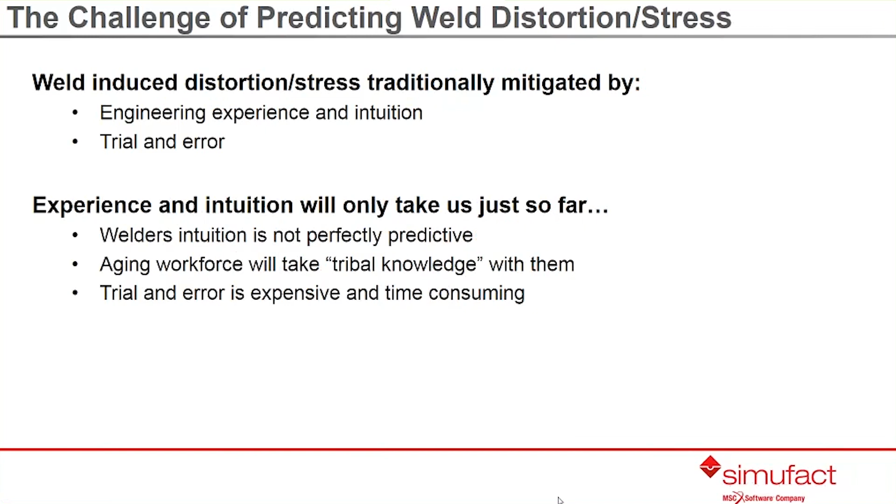The primary challenges with weld distortion and residual stress have traditionally been mitigated or managed by two primary ways. One would be the experience of the welding engineer and good old-fashioned trial and error. Unfortunately, the experience and intuition of welding engineers is not perfect and not perfectly predictive. And with today's aging workforce, a lot of this tribal knowledge is going to go away when those individuals retire. Additionally, traditional trial and error is generally expensive and time-consuming.

There are modeling tools that can predict weld-induced distortion and stress. However, these tools need to be more accessible. They're typically difficult to utilize and generally not available to those people who do not have extensive FEA or finite element analysis experience.

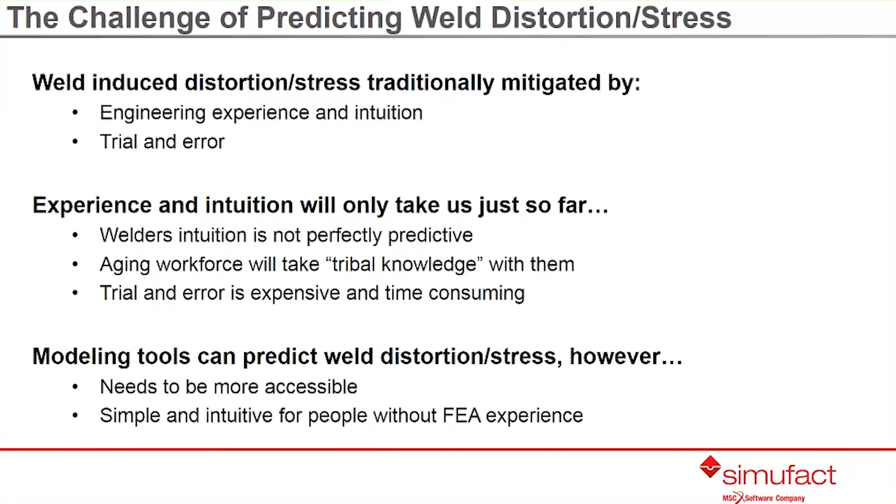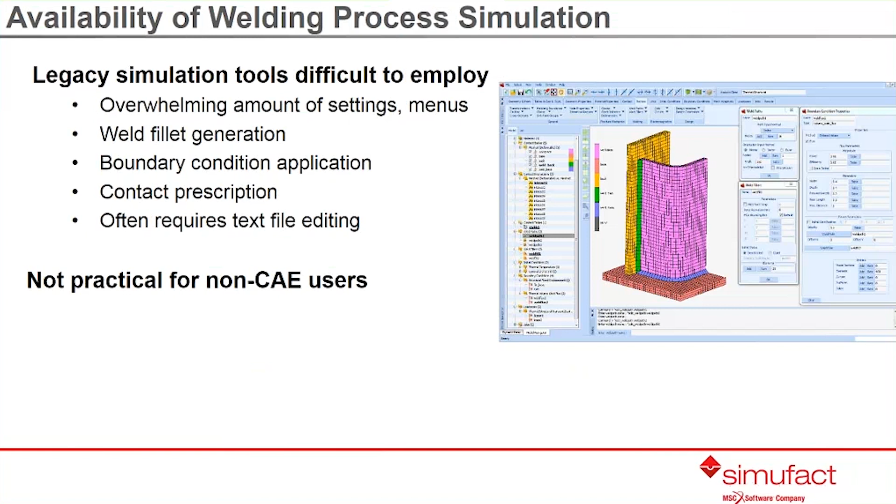What we would call legacy simulation tools are difficult to employ. There's a huge number of settings, difficult to create things like weld beads or boundary conditions, clamps, fixtures. One has to often prescribe contact, tell the software when bodies are in contact, and even get into the point where you have to edit the text file that drives the simulation. All of this makes it not practical for people who are not very well versed in CAE.

So I asked the question: if it wasn't limited by the complexity of the software, who would be the right group of people to utilize the simulation? In my opinion, it's the welding engineers, or at least people a little closer to the shop floor.

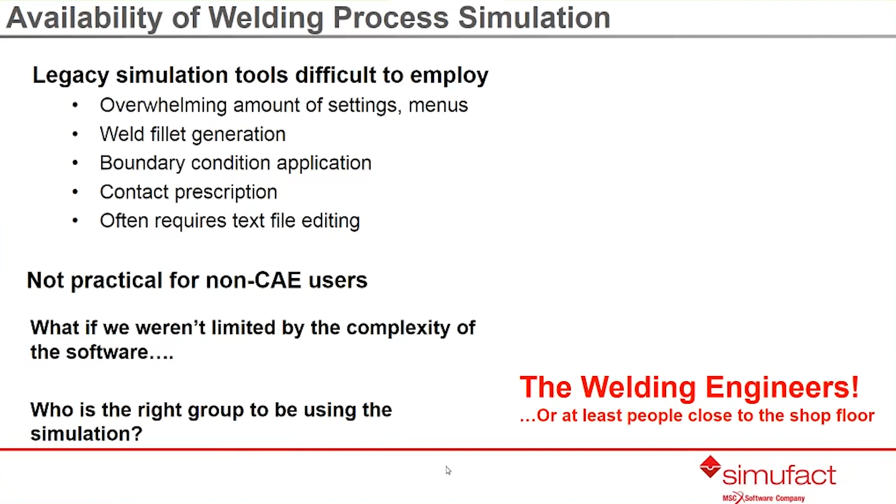Looking at the difference between the two groups, there's a significant gap between the environment of the CAE analysts and the welding engineers. They're separated by a number of things we'll look at: experience, work environment, organization, time zone.

On the left-hand side, typically the CAE analysts and designers have an education or experience of master's or PhD level in computational methods or some other high-level work. They work in a computer lab or design studio. A lot of times it's within the design group, and oftentimes far away from manufacturing or even overseas.

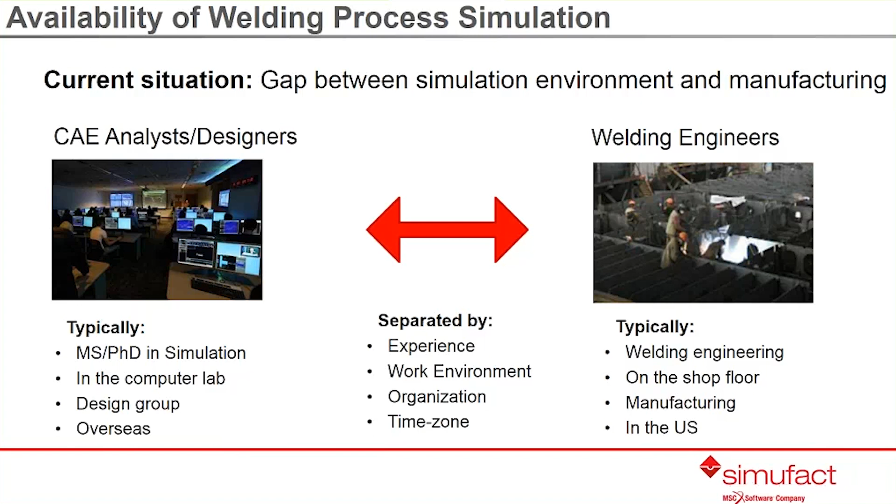By contrast, the welding engineers are welding engineers, or in many cases welding engineering technicians or technologists. They work on the shop floor, close to the fabrication and manufacturing, and are in the US or very close to where the parts are actually being manufactured.

So what if we enabled the welding engineers to run their own simulations? This is where the concept of democratization of welding CAE, or welding simulation, comes in. There are several advantages to this. First is the opportunity to have greater amounts of analysis being done, because you have a greater number of people who have access to it and can make it work.

Also, these welding engineers have the insight to realistically model the process. They understand welding and how to realistically model it, and what sort of steps to take to mitigate weld-induced distortion and stress in the real world that can be applied to the finite element analysis models.

This also reduces the time and communication loop necessary to build and iterate on models. If every time they created a model you had to communicate between the welding engineer and the designer, and then the designer has to create the model, solve it, send the results back, and have another meeting and another meeting—each of these iterations or communication loops is time, and an opportunity for error within the communication. Generally, it also increases the base of knowledge for the organization.

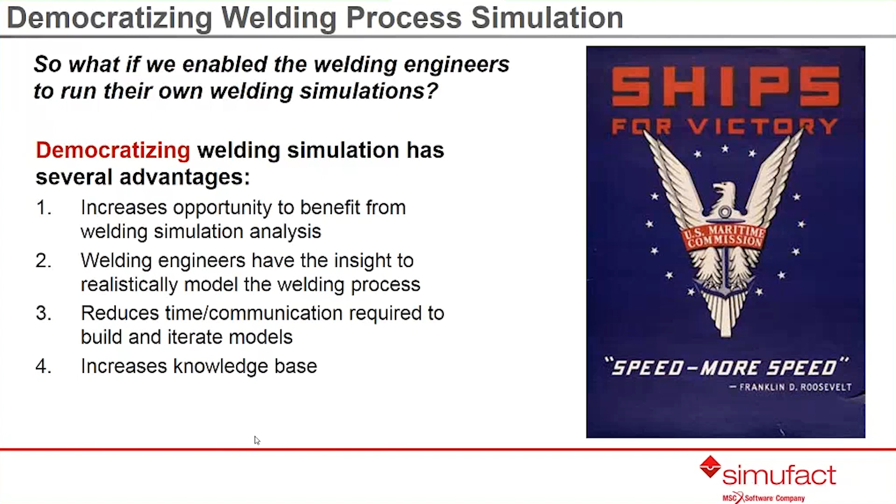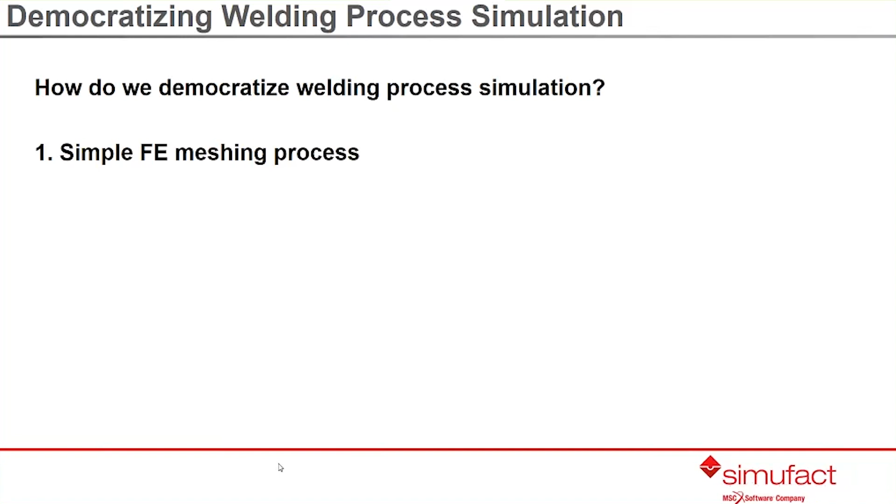So the question is, how do we do this? How do we democratize welding process simulation? The first part is a simple FE, or finite element, meshing process. The second is a process-oriented user interface—something that mirrors the shop floor and the process on the shop floor, minimizes the requirement for FEA so you don't have to be an FEA expert, is capable of modeling all the different welding processes, and also simplifies a lot of the process modeling.

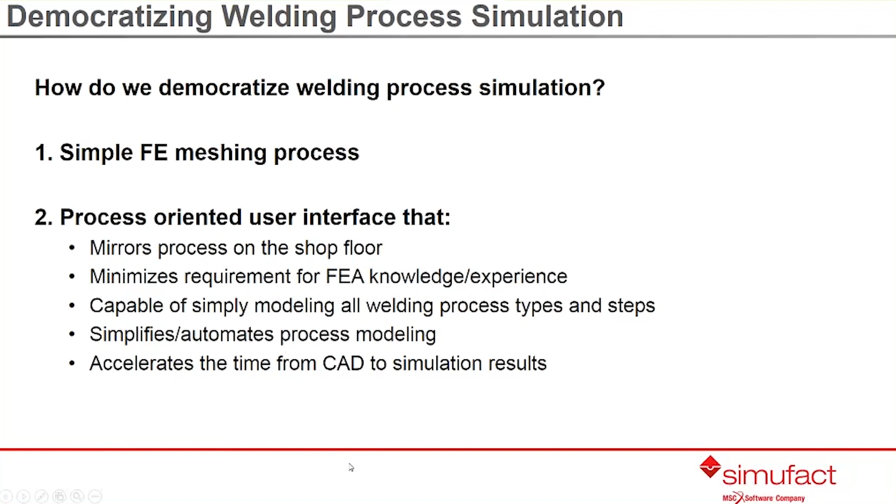The benchmark we always use is time from CAD to results. So the first step would be meshing. For any of you familiar with finite element analysis, you know this can be very painful and take a long time in many cases.

With the MSC Apex tool that we utilize within our welding workflow, this time is reduced dramatically. For flat surfaces, as you can see here, we utilize a mid-surface where we create a 2D mesh. Then for bulkier parts like these rings, we can create a volume mesh. In this case, we're going to create a mesh in about 30 seconds.

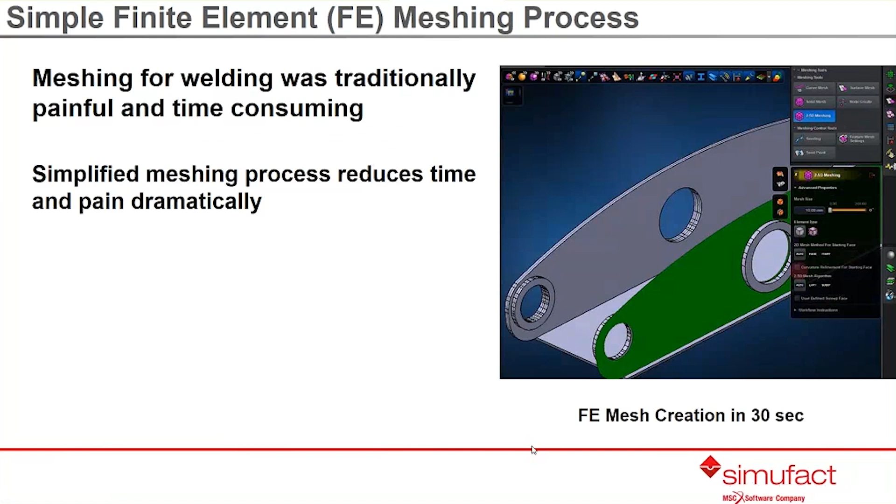So here we're going to select which part we want to mesh, and then be able to seed that part and actually create multiple elements through that thickness, say 3.

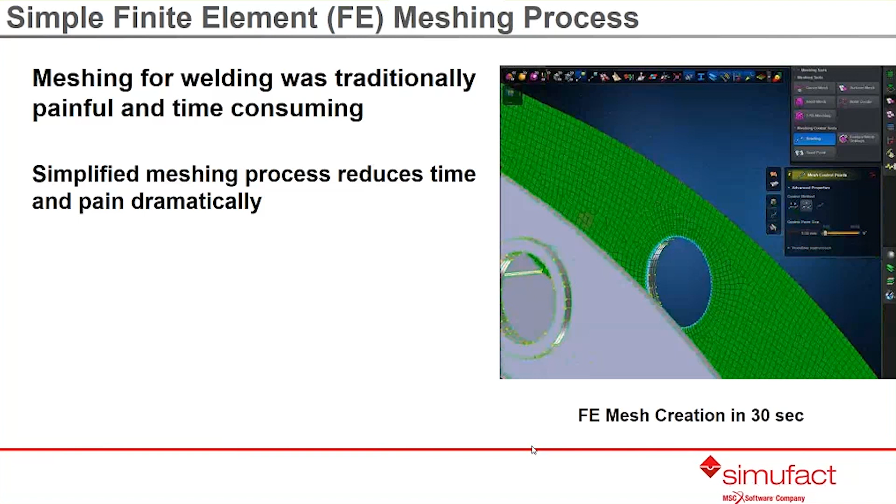Then we're going to create the surface mesh for this other part, the side. And perhaps we want to seed that mesh to give it a little bit of refinement closer to the welded area. And you can see that the mesh was created. So from this 2D mesh, we would then export from MSC Apex, and then upon importing into Simufact Welding, that mesh would automatically be expanded to a solid volume, utilizing either a solid mesh or a solid shell.

As I mentioned, this is becoming a semi-automated process. We do actually have subroutines that can do this, or much of this work, in an automated fashion, taking something that would have typically taken many, many hours or days down to, say, less than 10 or 15 minutes.

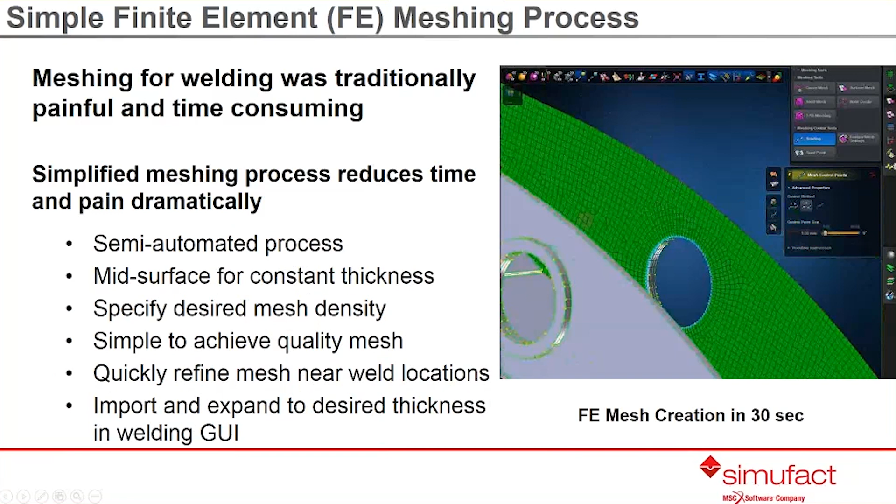So the next aspect of it that we discussed was the process-oriented model setup. And I'm going to go ahead and click this animation, let it play, but basically we're going to go through this same model that we're utilizing as this outrigger, something you would see on, let's say, a bucket truck. I'm going to go ahead and let it play, but you're going to see essentially the entire process modeling step be completed in about 3 minutes.

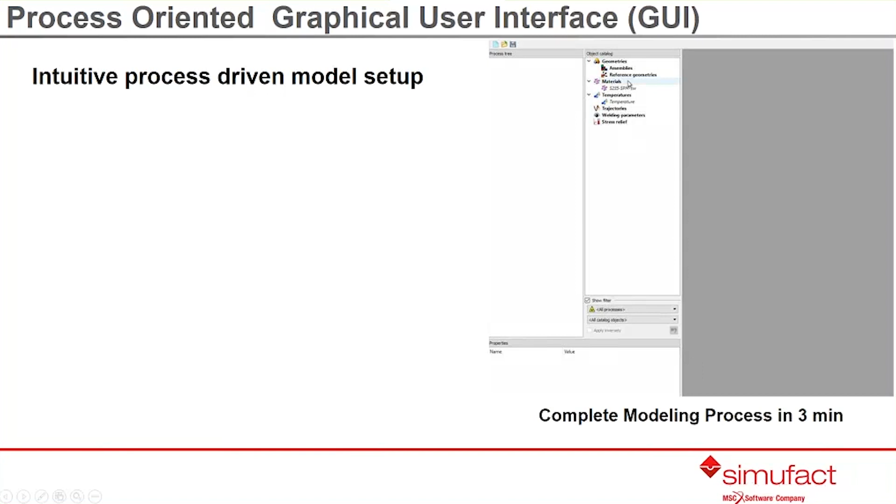So within this workflow, you can see that, again, we're going to go ahead and basically import the geometries. And you have an object catalog on the right-hand side, which is where all the parts, all the different components, are imported. You can select a variety of processes.

And basically, utilizing an automated approach or semi-automated, to utilize wizards, and that sort of thing, can accelerate the import and creation of the model.

So this is the mesh that we just created. We'll go ahead and create a weld line. And we're going to go back through some of this stuff in a little bit more detail in later slides.

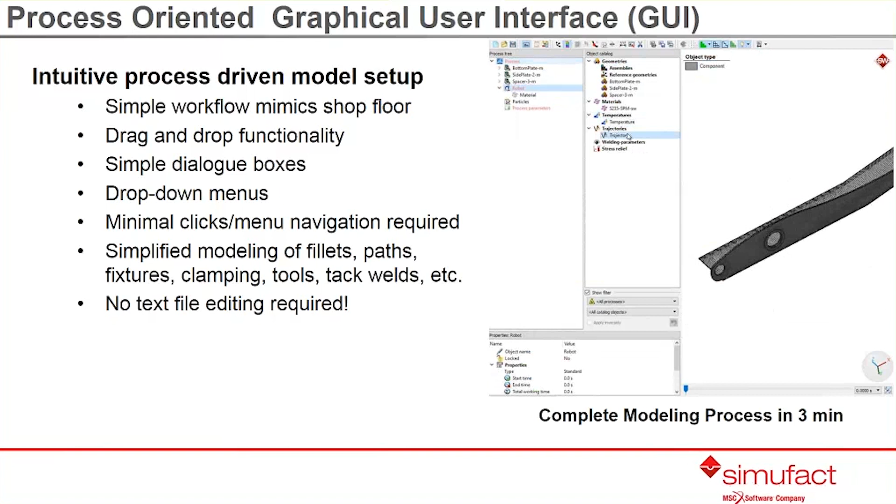But as I mentioned, being able to go and have a workflow that mimics what's happening on the shop floor is very similar to what you would actually create. I mean, what do you need when you're building a welding, a part for welding or setting up a process?

You need parts, it has fixtures. The parts are made of a material. You have weld lines. Those welds have a filler oftentimes associated with it. Also the weld settings: voltage, amperage, travel speed, and a heat source.

And so being able to essentially set up the welding simulation to mirror what you're doing on the shop floor, without having the extra complexities associated with traditional finite element analysis, makes it much easier and quicker to set up.

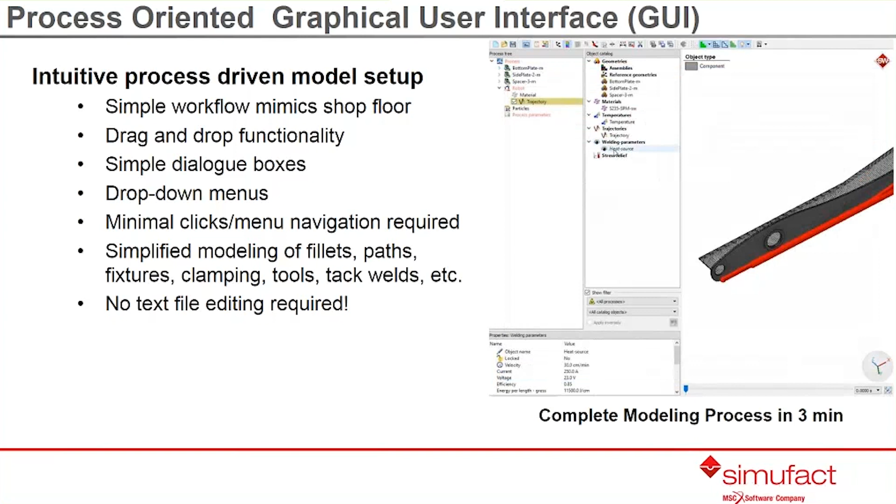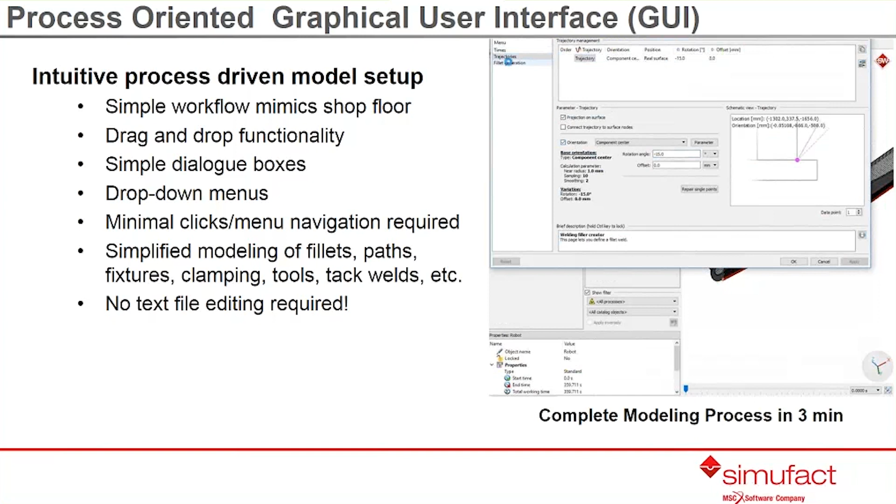Again, being able to have simple drop-down menus and dialog boxes that control these things. We're looking at a very simple part here, but you can do this with hundreds of welds and varying weld geometries, and still be able to very effectively, quickly, and simply do things like creating weld beads, creating clamps and fixtures, things that often would have taken a great deal of time.

And this is actually one aspect of it, the fillet generation, that saves a tremendous amount of time. You can see that we're actually creating the weld bead right there, and if you want to, you can vary it, and it's automatically updating the weld bead geometry.

So a lot of these things we've simplified, as I mentioned: modeling weld beads, paths, fixtures, clamps, tools, tack welds, etc., and then no need for text file editing required. So that was basically the entire modeling process, give or take, in about 3 minutes.

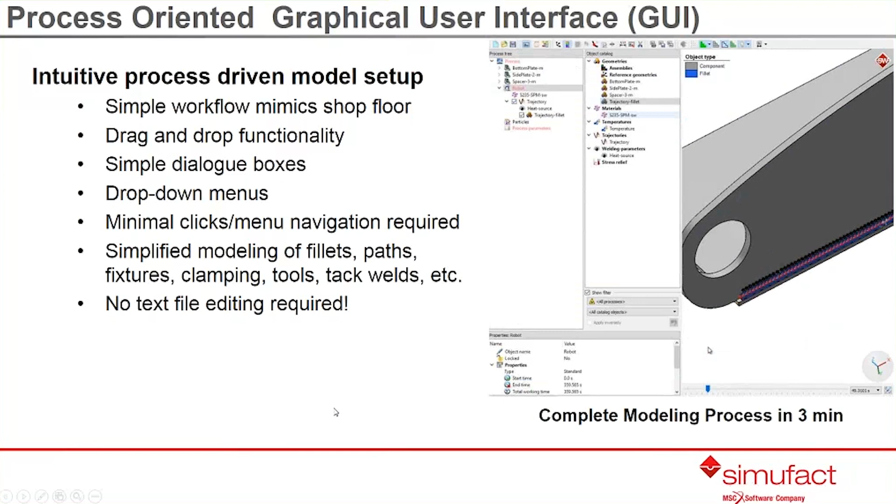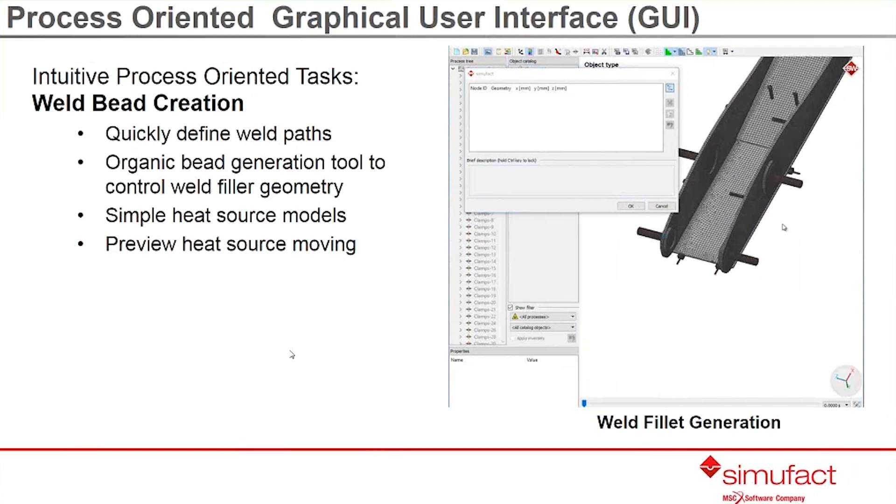So as we mentioned, going through in a little bit more detail, now you can see the remainder of this model being set up, being able to quickly define weld paths and having the ability to organically create weld geometry. Basically going to go through the same thing that we saw a second ago in a little bit more detail.

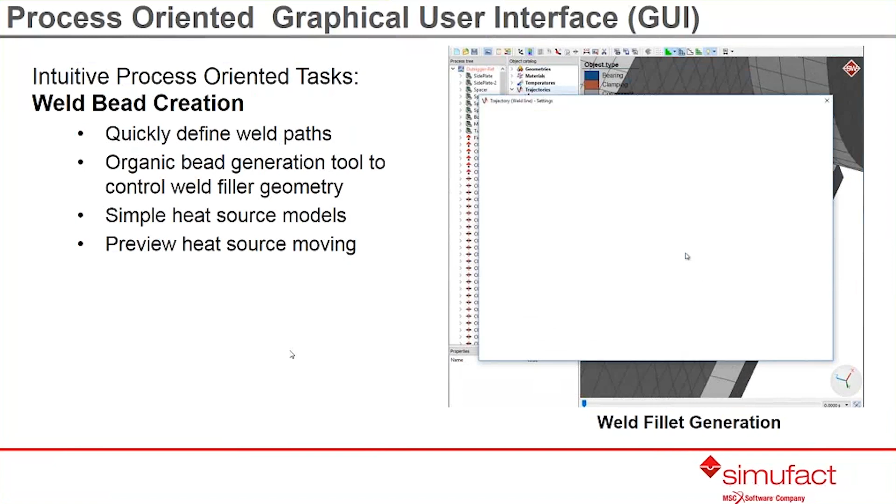So you're basically picking the nodes along this intersection, and it's automatically selecting the points along that line. And then that becomes a weld line. And you could easily change the orientation or start from one end to the other.

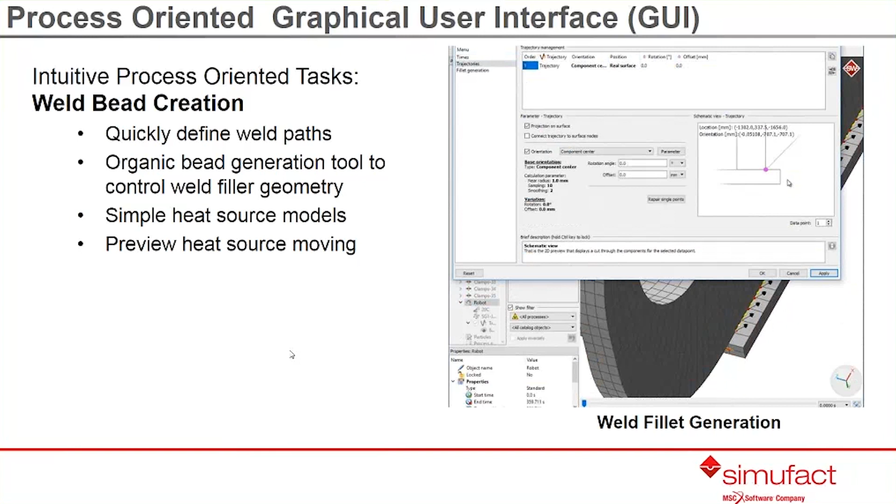And then we just drag that weld line onto our, what we call robot or welder. It should be, in my opinion, a welder, not a robot, but then you can vary the orientation of the part. So if you wanted to have the torch have an inclination angle, again, this is going to affect where the heat source is going to impact or intersect your geometry, as we'll see in a second.

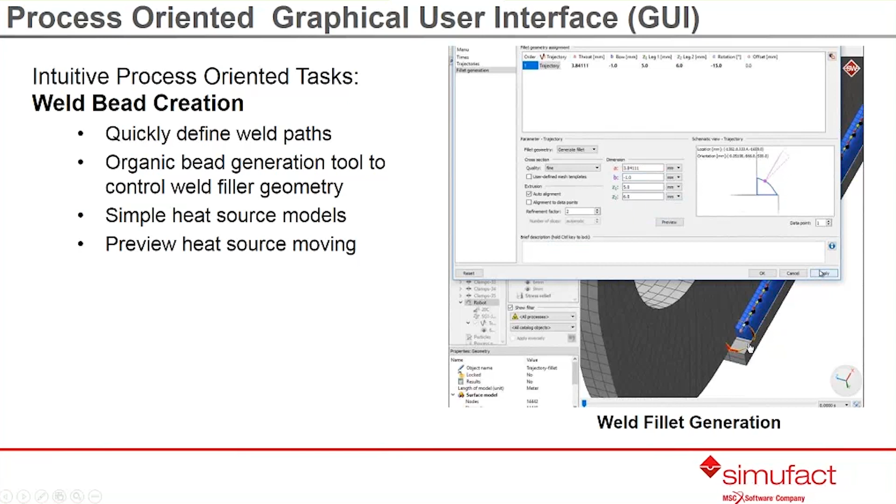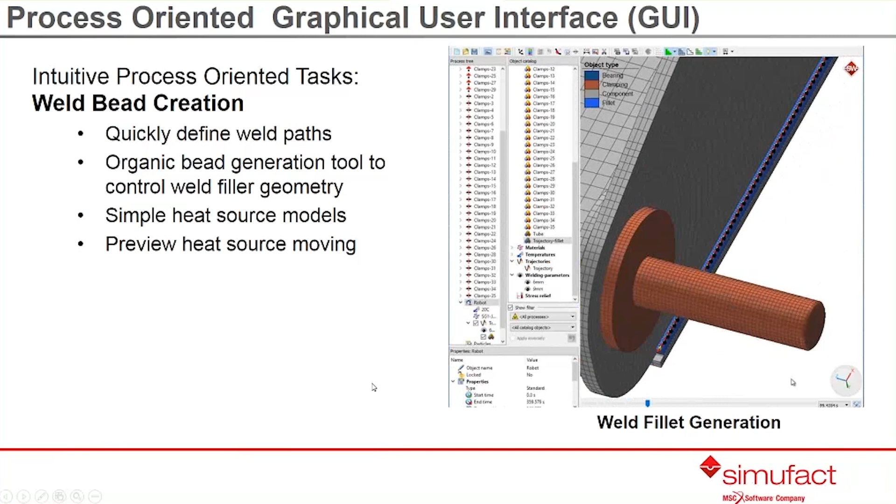And then we're going to go ahead and generate that weld fillet. You can see also that little red heat source down below. This is actually your heat source that can be adjusted, and that's the volume where the heat, the energy, is imparted to the part. So there's a good amount of control, and this is something we're continuing to improve to make much more flexible in being able to vary these weld beads. You can play the animation, slide it back and forth to follow your heat source around before you actually commit to initiating simulation.

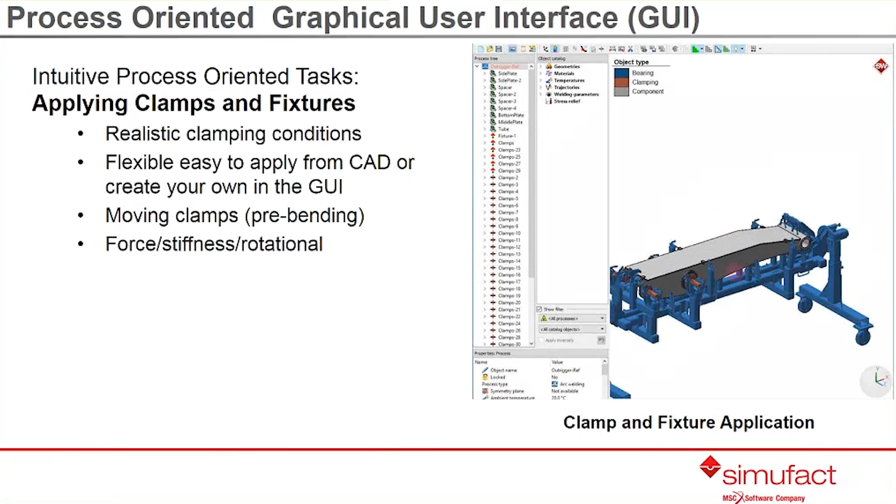Similarly, applying clamps and fixtures is something you very often do within a welding simulation. You can see here that we're utilizing the entire fixture, something that may or may not be relevant. So being able to have realistic clamping conditions and then flexibility to either build it in from your CAD or create it within the user interface. Within a clamp, we could utilize stiffness and force, or what we call a moving clamp.

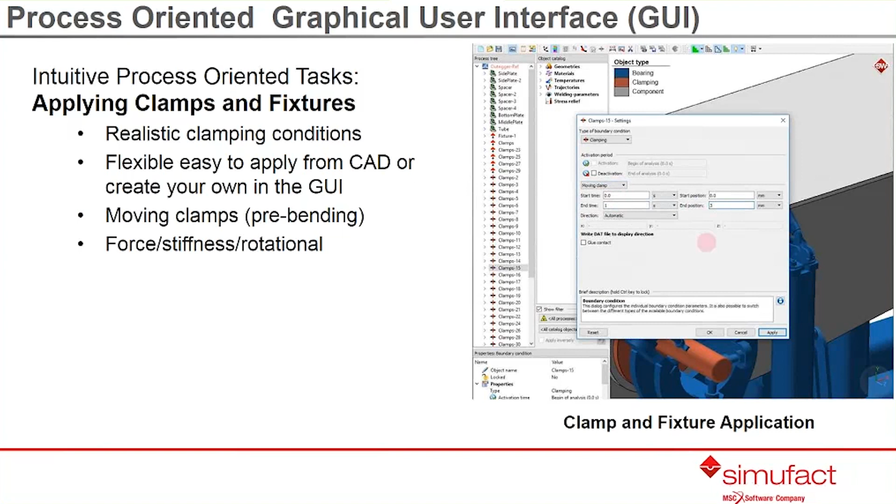Stiffness has just stiffness, or you could apply a force as well. In this case, we'll have a stiffness, which could be translational as well as rotational stiffness. And then a moving clamp, essentially it says push in a direction, displace the clamp a certain displacement over a period of time. So in this case, it would take 1 second to move it 3 millimeters. And whatever force would be required to push that in the specified direction would be applied, and that would impart a residual stress and potentially plastification of the part.

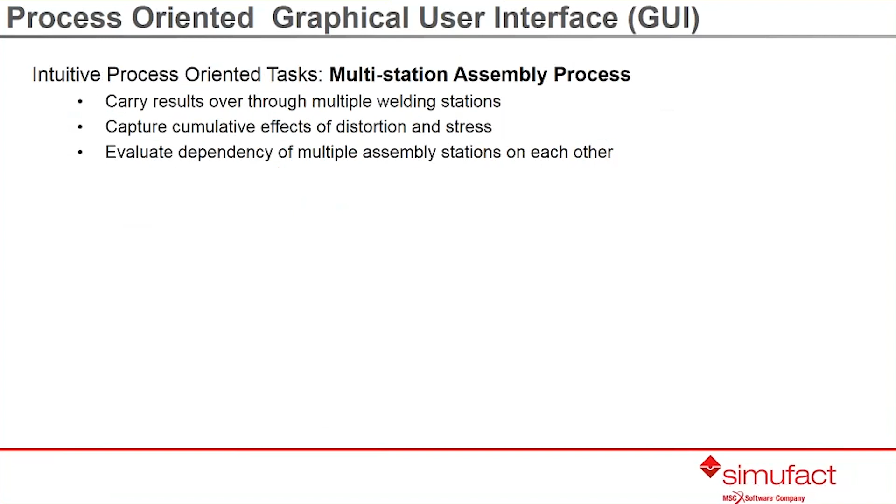Also being able to have a multi-station assembly process. This is something that came out of the auto industry and tier 1s and OEMs wanting to be able to go through the assembly process and essentially go station by station through the welding process. And as you get these distorted parts, oftentimes they don't fit very well.

And so being able to actually assemble them through what we call a cooling and clamping step, you can push parts together. You can, let's say, force them to overlap each other, and if there's some sort of intersection, the software would actually resolve that intersection and allow it to slide around each other, so as to achieve the type of fit that's very realistic.

This could also be used to take a number of pre-distorted sub-assemblies and clamp them into contact, clamp into place. Something that would have been very, very difficult to do in legacy welding simulation environments. And of course, it captures the cumulative effect of the distortion and stress.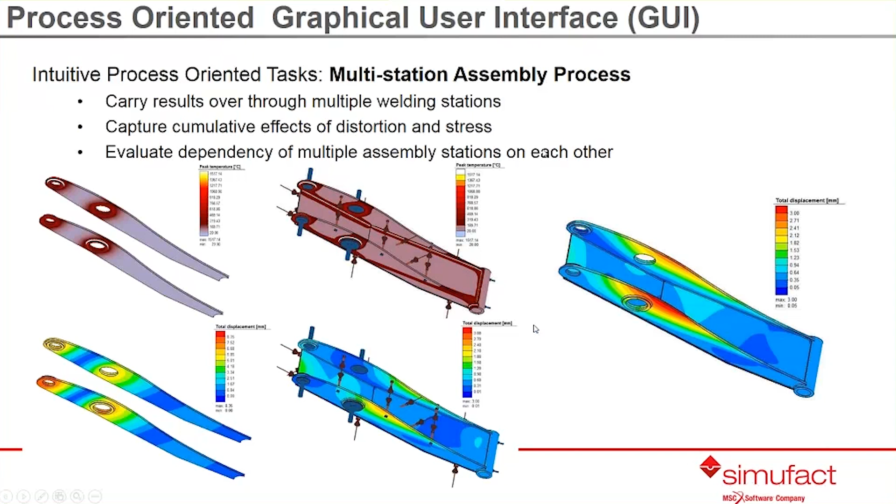What do you want to do with the rest of your week?

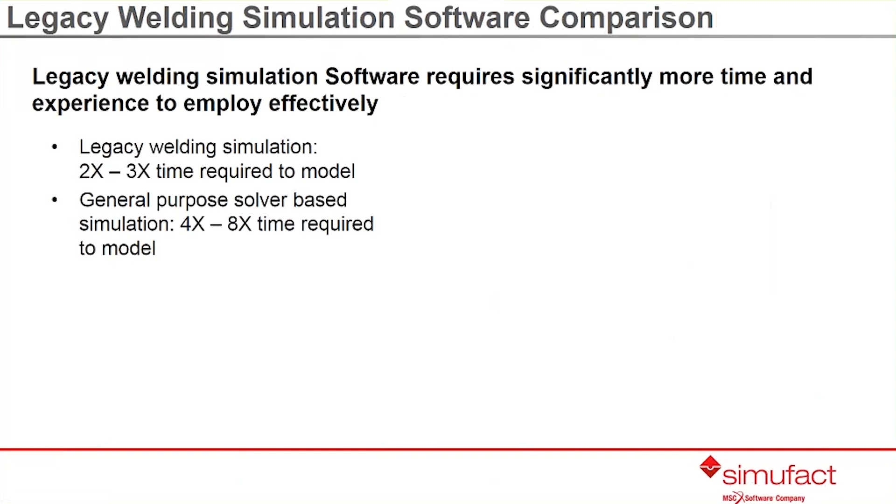So here's a little comparison. This is just a benchmark that we conducted. If you see from some of the standard steps that you would go through, CAD import, meshing, thermal boundary conditions, weld lines, heat sources, fillet geometry generation, clamps, fixtures, total modeling time, solve time, and post-processing. With this benchmark, it took about 7 hours from initial CAD to results. Doing this in a legacy software, you'd be looking at, and you could see the distribution of the times of what was required, could be looking at 14 hours, about twice as long, and then a general purpose solver could be expecting significantly more than that.

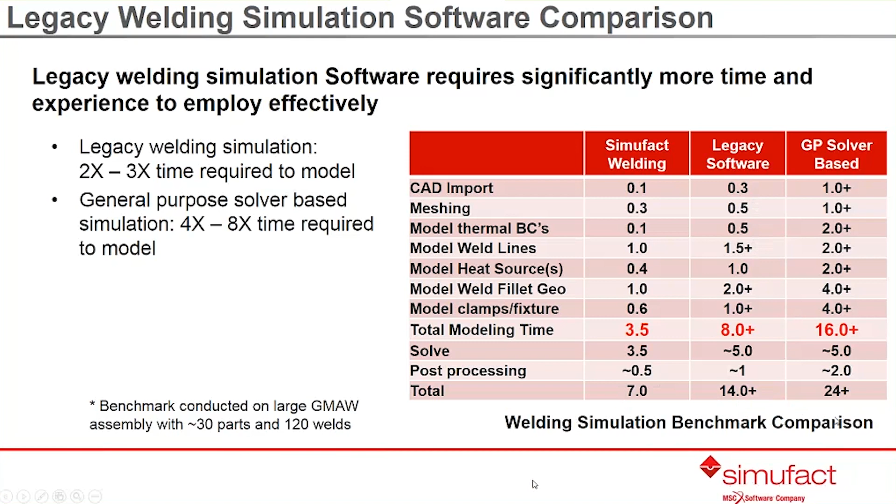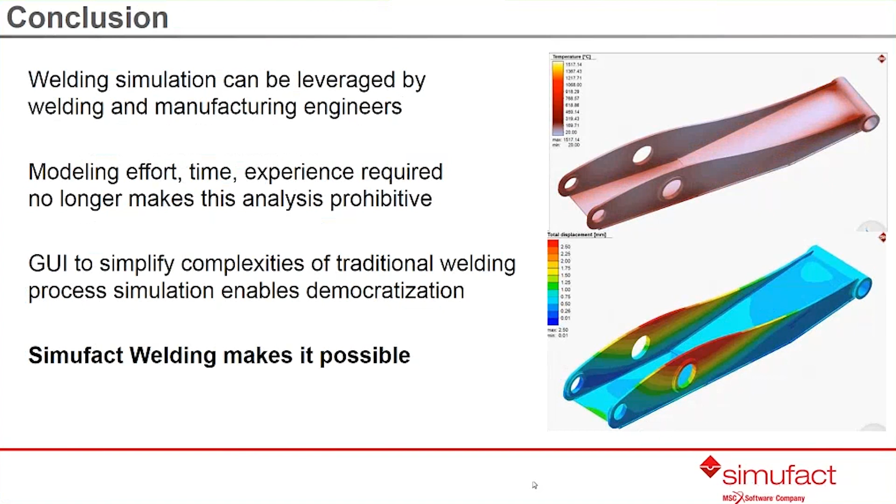So just a quick conclusion: welding simulation is able to be leveraged by welding and manufacturing engineers. This is not something that was always the case. Modeling time, effort, and experience is no longer prohibitive. And in fact, the experience of welding engineers, in my opinion, will make welding simulation better. Being able to have a GUI, a user interface that simplifies many of these complexities and gives it a process-oriented approach, is what's going to enable this technology. And Simufact Welding has made this possible.